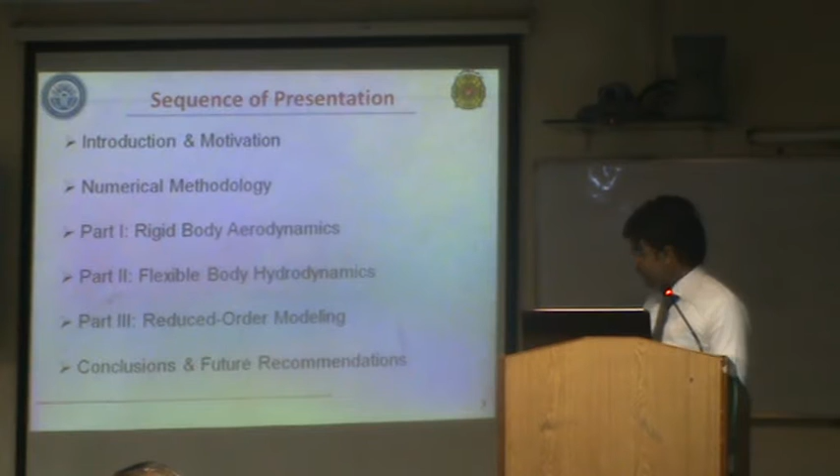So this is how I would proceed with this presentation. First, I would mention what motivated me for this study, and a brief introduction about my research methodology which I have employed for this research. Then I would move on to different research phases: Part 1, about rigid body aerodynamics, then flexible body hydrodynamics, and then we developed some reduced order models. Finally, I would move on to the conclusions, a few contributions I made during this research, and the future recommendations would be presented.

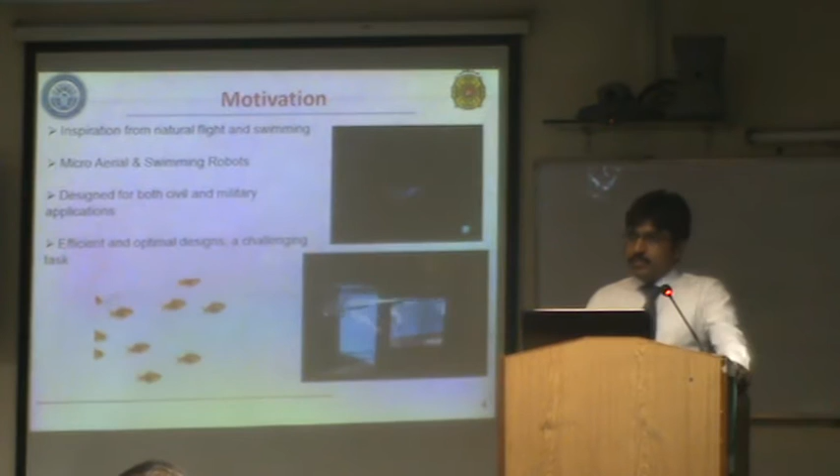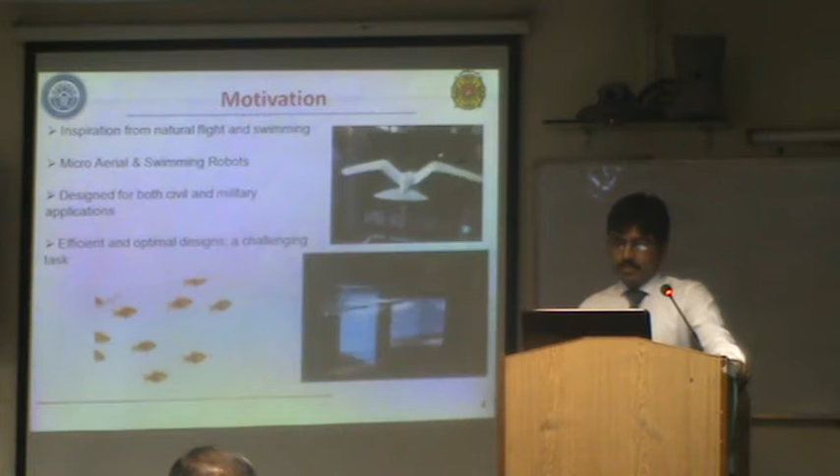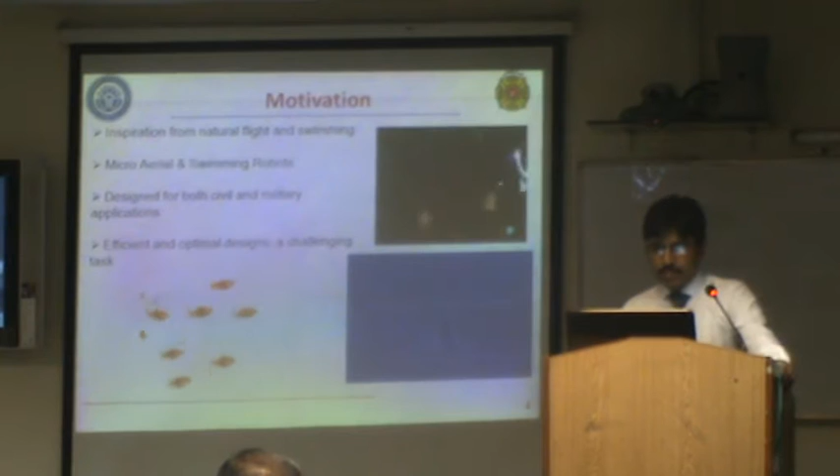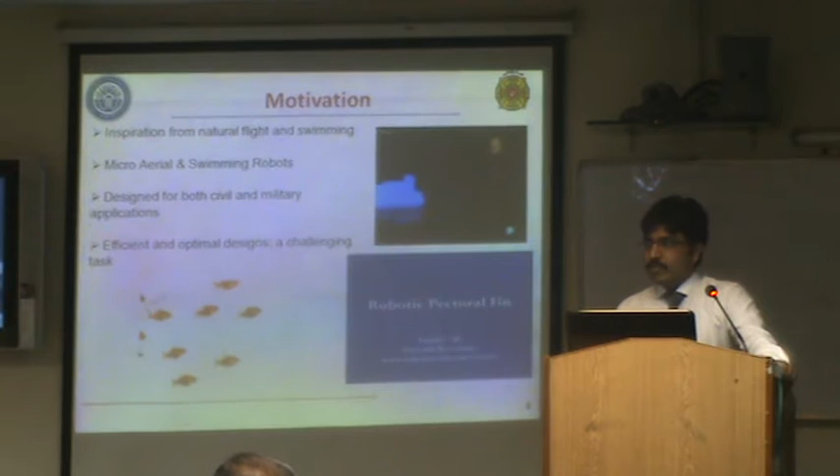Ladies and gentlemen, most of the time, inventions and discoveries take inspiration from natural systems. In case of micro air vehicles or micro swimming robots, the same inspiration comes into play. You can see a few applications over there, designed both for military and civil purposes. To propose optimized and efficient designs is a challenging task because so many subsystems and disciplines are involved.

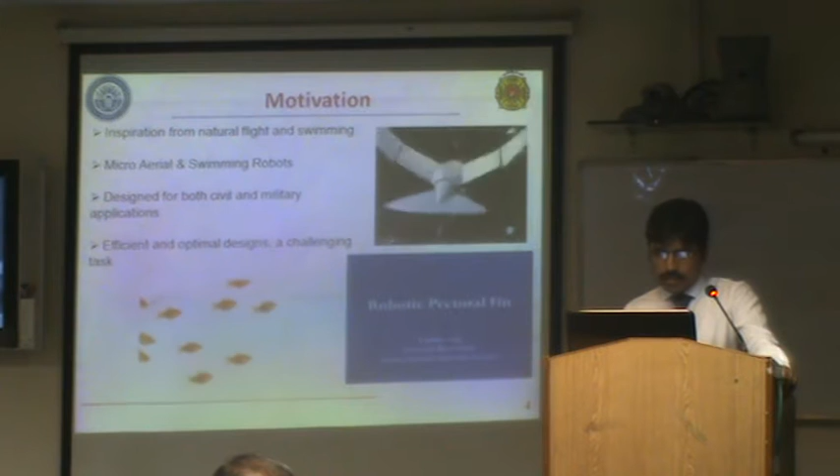Most particularly, I would like to have your attention on this particular figure where you can see multiple bodies swimming in some group. This is known as a fish school, and what they are doing, I would explain later on. They are trying to control the flow around them, taking advantage of each other.

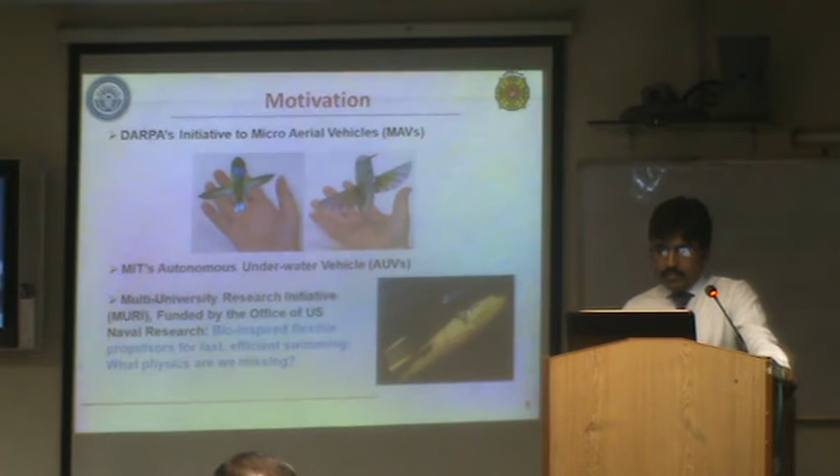These are examples of a few heavily funded projects. The first one is DARPA's initiative, the Defense Advanced Research Project Agency in the USA. In the 1990s, they initiated this project where they intended to develop micro and nano air vehicles. You can see one example over there. Still, it is just a prototype; they haven't manufactured it properly.

The second one you can see in this figure, the lower one, is about MIT's autonomous underwater vehicle. It is still under development. Then a very recent project is being done by a consortium of different universities in the USA, titled Bio-Inspired Flexible Propulsors for Fast, Efficient Swimming, but what physics are we missing. This is being done by Dr. Haibo Dong as well, and I was fortunate enough to have a place in that group for 6 months during my stay abroad.

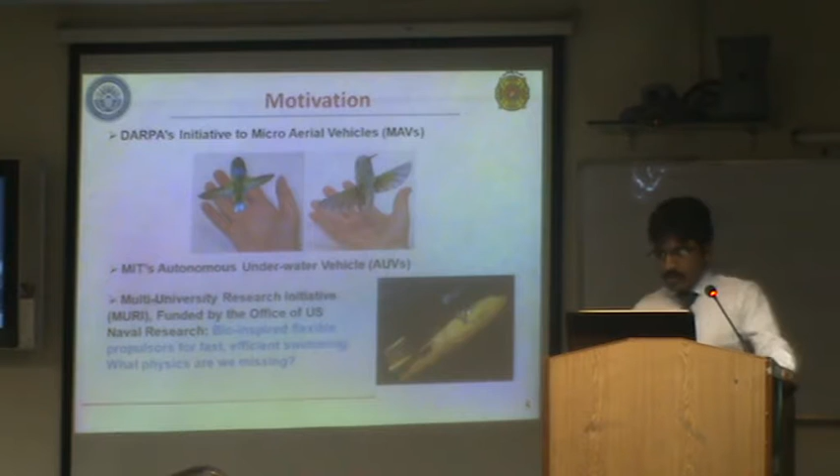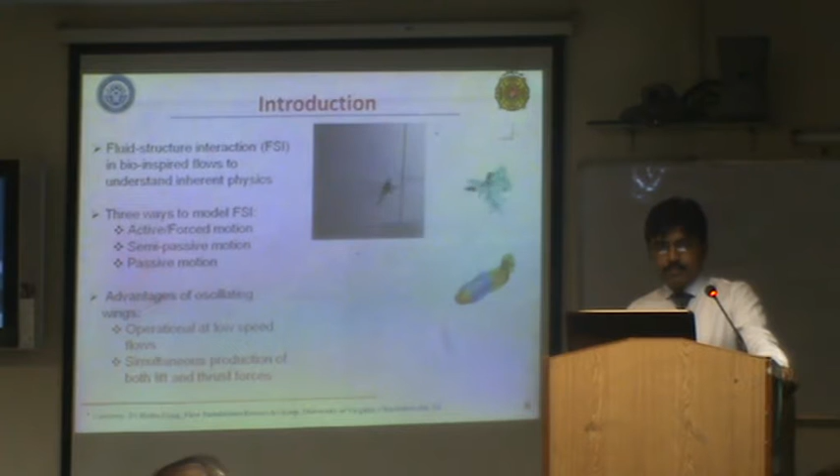Now, whenever we talk about natural systems and flying, it involves complex fluid structure interaction phenomena. Because we are taking inspiration from nature, these flows are known as bio-inspired flows. When performing numerical simulations to look at those phenomena, there are 3 ways to model the FSI. First, you give a mathematical function to forcefully move the structure. Second, some degrees of freedom of the motion are controlled by an explicitly defined mathematical function, while others are computed through feedback from the fluid. The third involves complete passive motion, which is the most difficult because it needs two-way coupling.

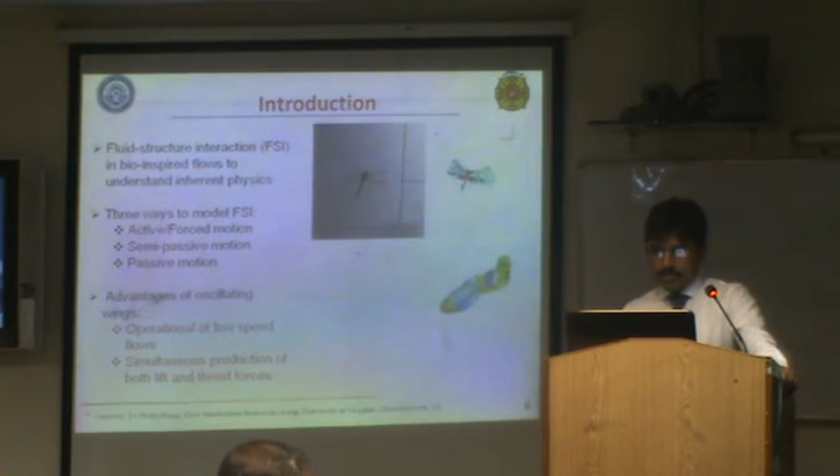As far as the advantages of this kind of motion are concerned, in nature you see these flapping and undulating motions in case of fishes. The advantage is that most of the time these species operate at low speed flows, and second, through this motion they simultaneously produce lift and thrust. That is why nature adopts this mechanism for production of aerodynamic or hydrodynamic forces.

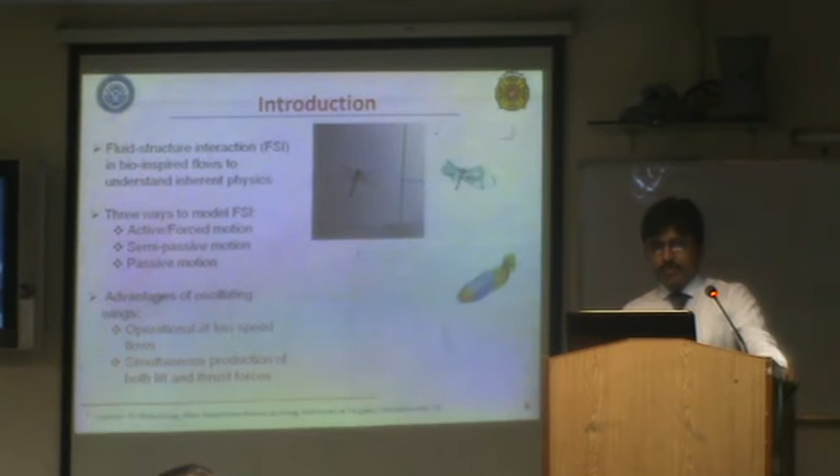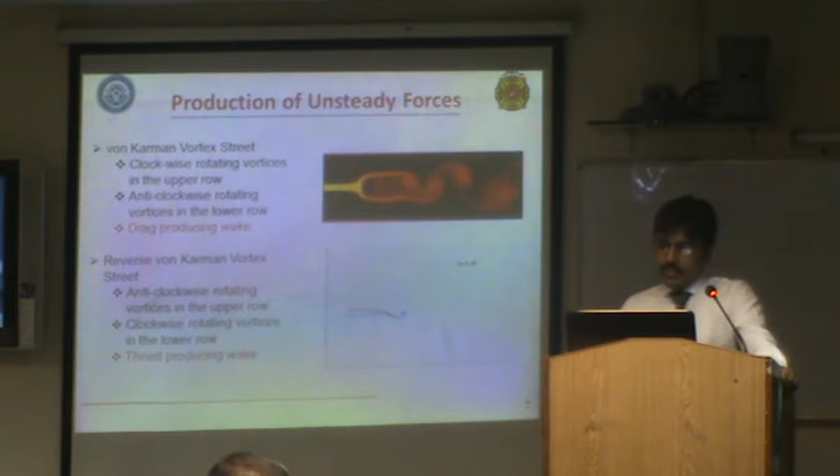If you look at the flow structures around these bodies, you see complex flow patterns known as vortices. This is a simple example of those vortices in the above figure. In the first figure, you can see a blunt body, a flat plate put in the flow, and you see certain rotating flows in the downstream direction. These structures are von Karman vortices, and they are drag producing.

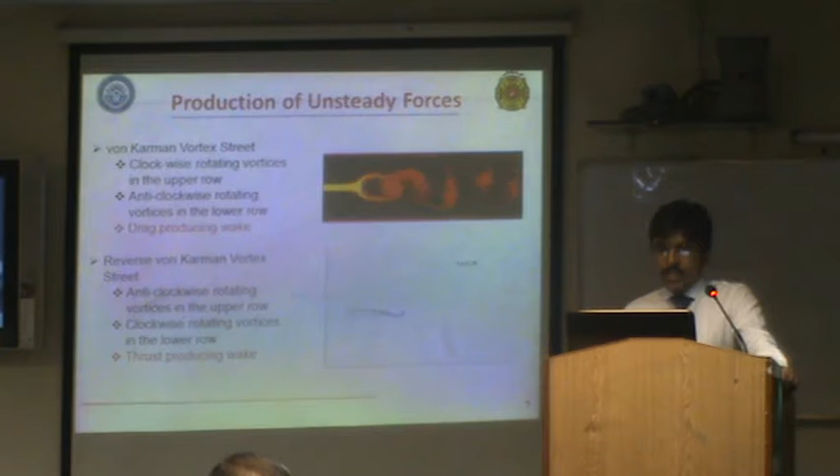If you look at the lower body, this is a streamlined body, a two-dimensional view of a wing or a fin. This produces exactly the reverse of that. For example, in the above figure you have clockwise rotating vortices in the upper row, but in the lower figure you would have clockwise rotating vortices in the lower row. So the effect would be reversed as well. The lower pattern is responsible for producing thrust.

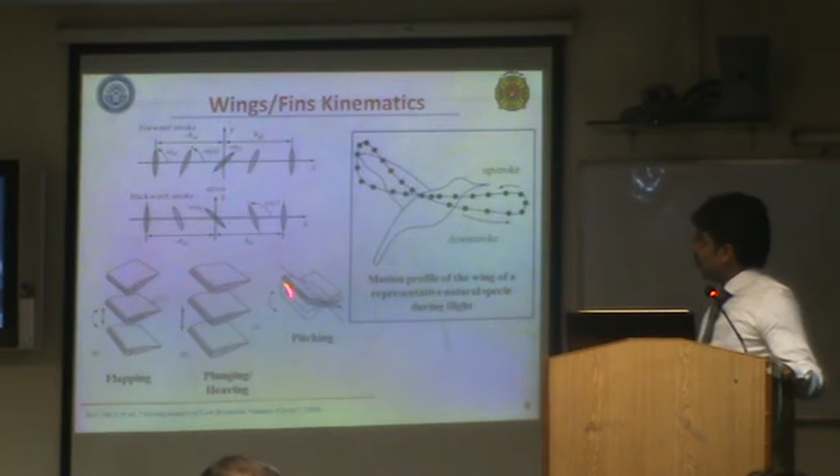So you can say that this figure provided me with a lead towards my study. The first research question which came into my mind was: what is the contribution of different kinematics towards the production of lift and thrust? So this is the first research objective.

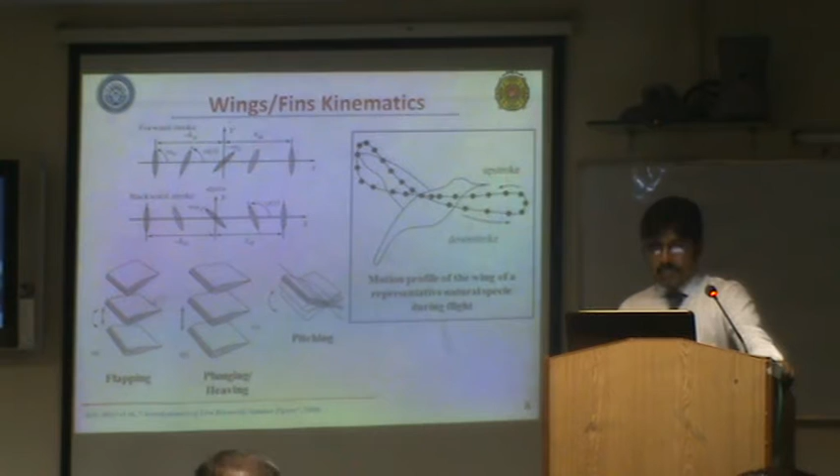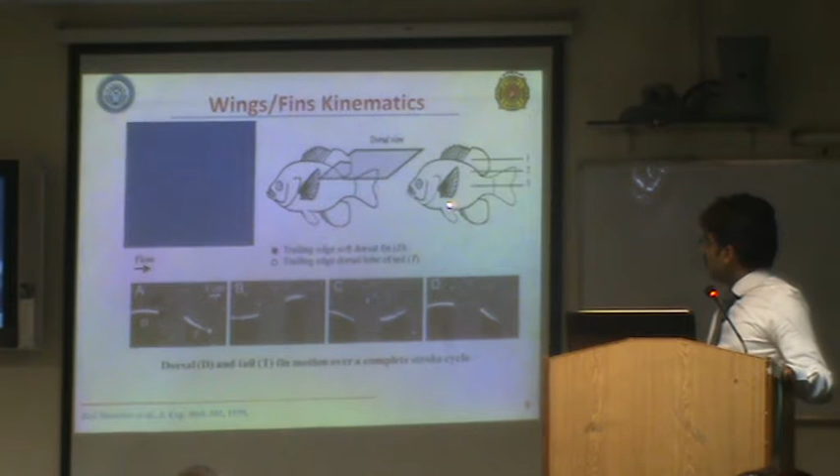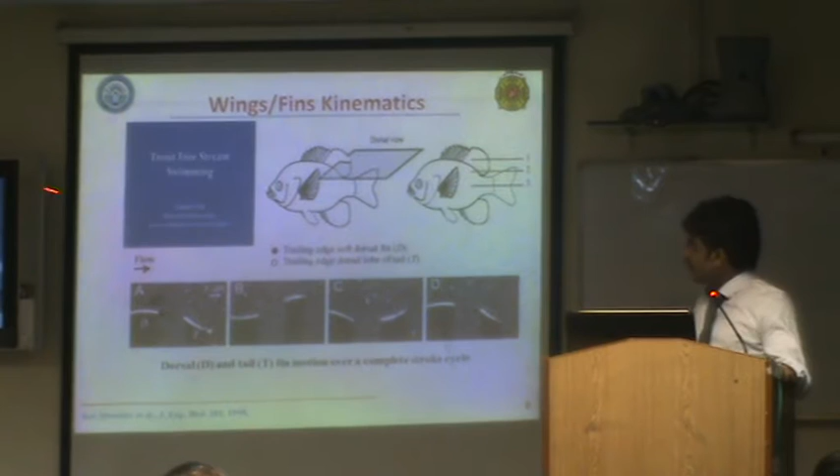The second one comes when you see that if we look at this plane where both tail and fin are involved, I am talking about the plane represented as number 2. These are the top views, and these tails and fins also perform a similar kind of motion, flapping. If you look at this video, that is the undulatory motion of a fish.

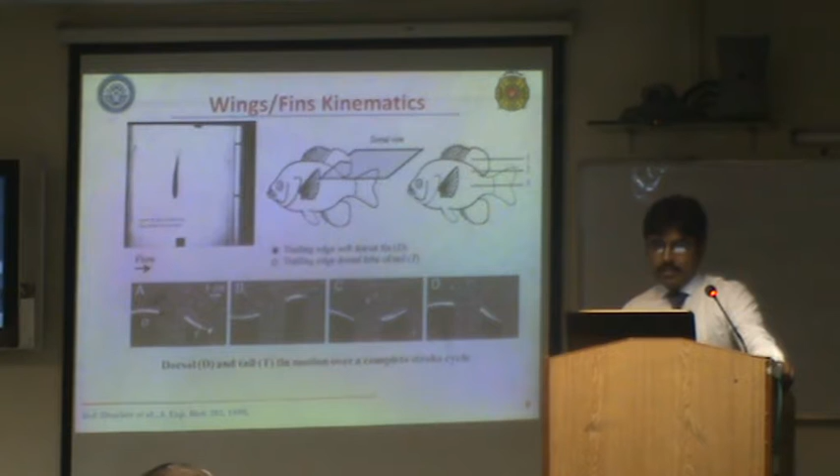So this provides me with a second question: what is the difference? Why do fish go for undulatory motion and why do birds go for flapping motion? What is the fundamental difference between those two motion types? Based upon my literature survey, these are the research objectives which I came up with.

First, to quantify the contribution of plunging and pitching motion of a rigid wing fin by finding an equivalence between them. This is just a way to look at the contribution both of these motions have towards the production of aerodynamic lift and thrust. The second objective is to look at the difference between the undulating motion and the flapping motion.

And the second thing is that I need to look at the passive flow control technique adopted by different fish while they are moving in a fish school. Looking at those things, I also did some mathematical work as well.

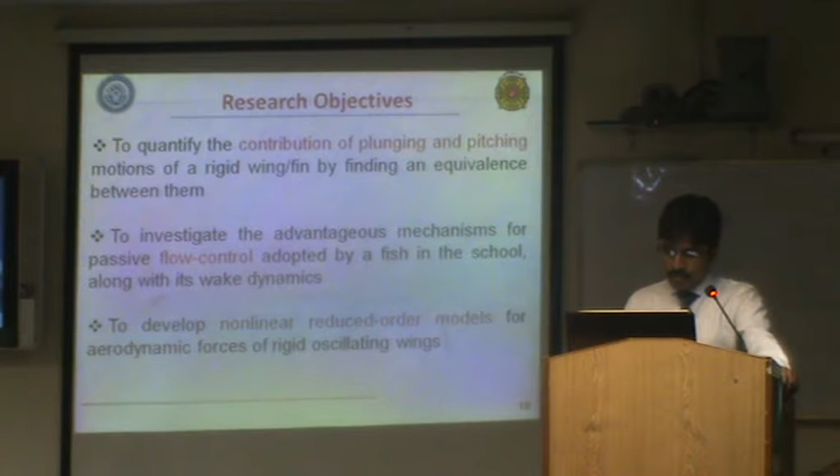I developed nonlinear reduced order models for aerodynamic forces of rigid oscillating wings. So these are, you can say, 3 parts of my research.

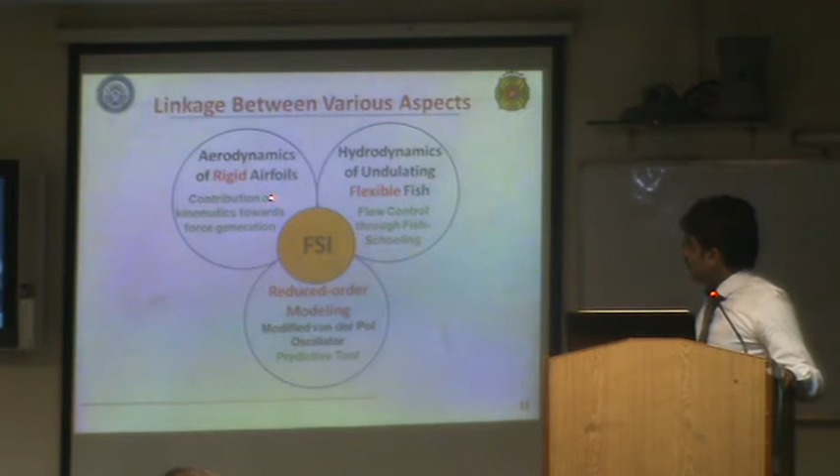In the first part, I am talking about aerodynamics of rigid airfoils, and the major thing is the contribution of kinematics towards force generation. The second part is composed of undulatory flexible fish, where I added flexibility into the rigid airfoil, and the major purpose is to look at flow control through fish schooling.

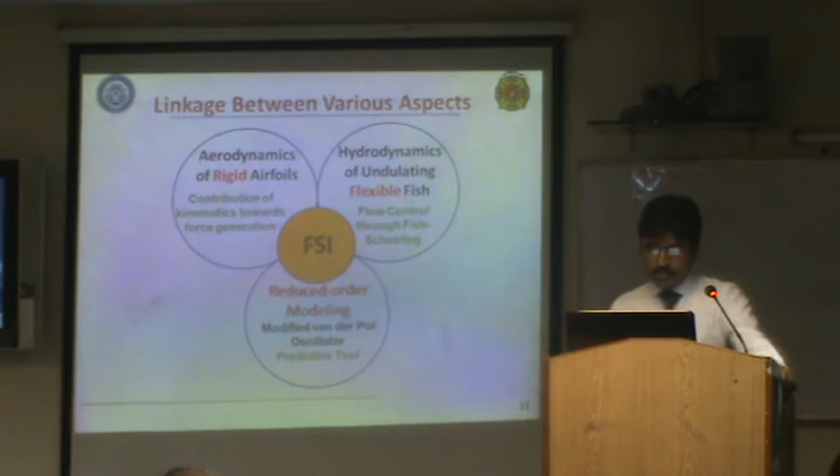And the third part would be the reduced order modeling, which is basically a predictive tool, and it gives us some advantage over the other techniques, the experimental one and the CFDs.

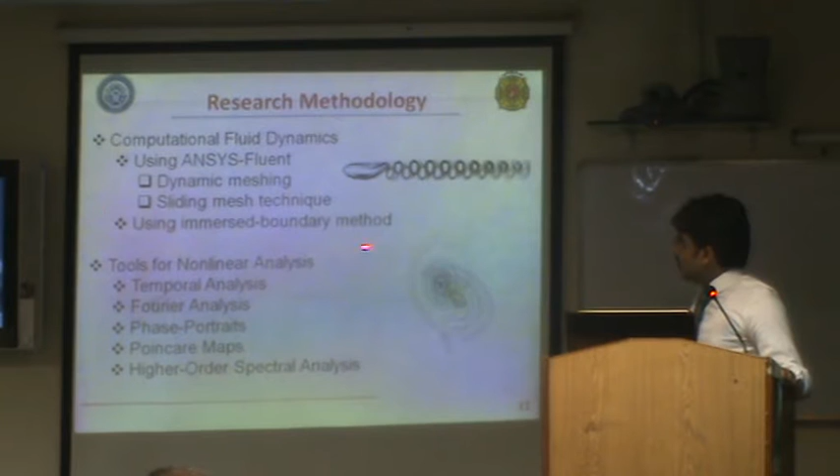Then during my stay at UVA, University of Virginia, I used an immersed boundary method code, which was developed by Dr. Haibo Dong. As far as the nonlinear analysis is concerned, I use modern tools to look at the behavior, the nonlinear characteristics of these flows.

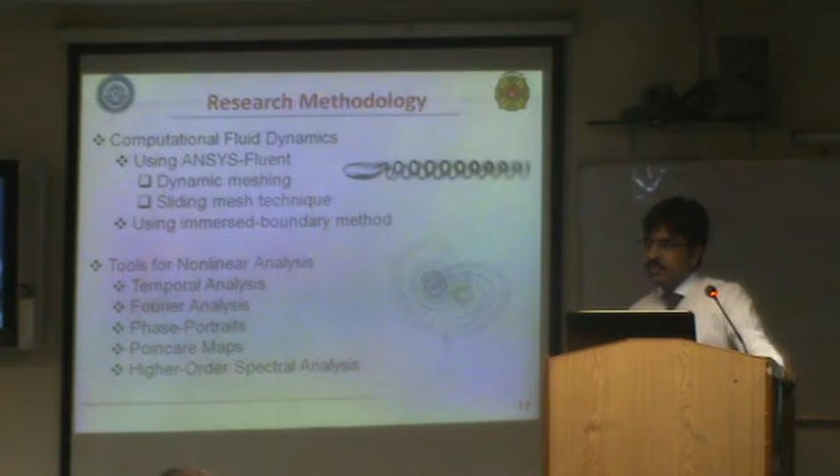The first tool is temporal analysis; you can see many features from these plots. Then the Fourier analysis to look at the spectra. Then phase portraits and Poincare maps to look at the period of the solution. And then I perform higher order spectral analysis to look at the frequencies interacting with each other to produce new frequency components.

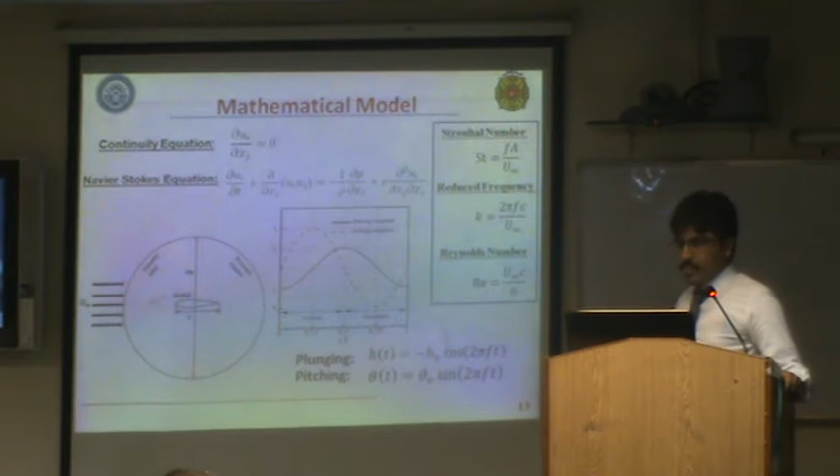As far as the assumptions are concerned for this study, I chose to talk about laminar flows because I needed to perform nonlinear analysis, so I did not want to incorporate the numerical dissipation added by turbulence models. The second thing is I added viscosity into it, because low Reynolds number flows are viscous in nature, so these forces are very much dominant.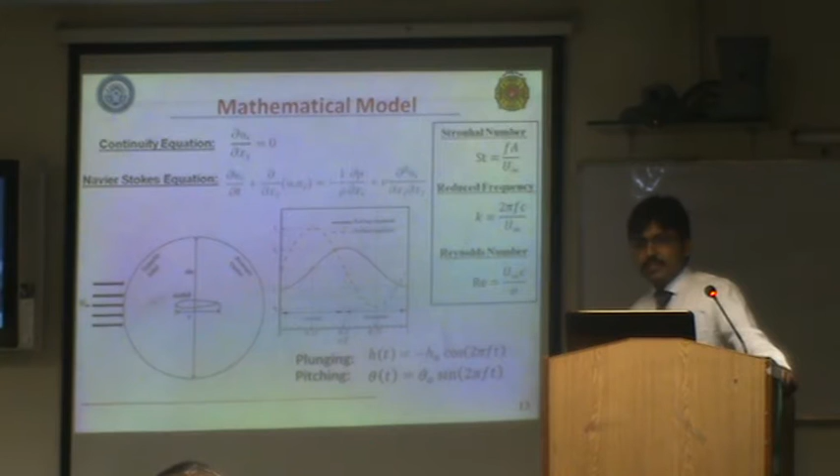If we look at the similarity parameters used for the experimentation, this unsteady aerodynamics is based upon the Strouhal number, reduced frequency, and the Reynolds number. F is the forcing frequency by which the wing is flapping or undulating, and A is the wake width, most of the time described as the displacement covered by the trailing edge of the airfoil.

Then I have reduced frequency, which is a non-dimensional frequency. We multiply the angular frequency 2 pi f with c, the chord length of the airfoil, and divide by u infinity. You can also see the Reynolds number, which is a ratio of the inertial forces and the viscous forces. So at hand we have low Reynolds number flow - I am talking about low speed flows.

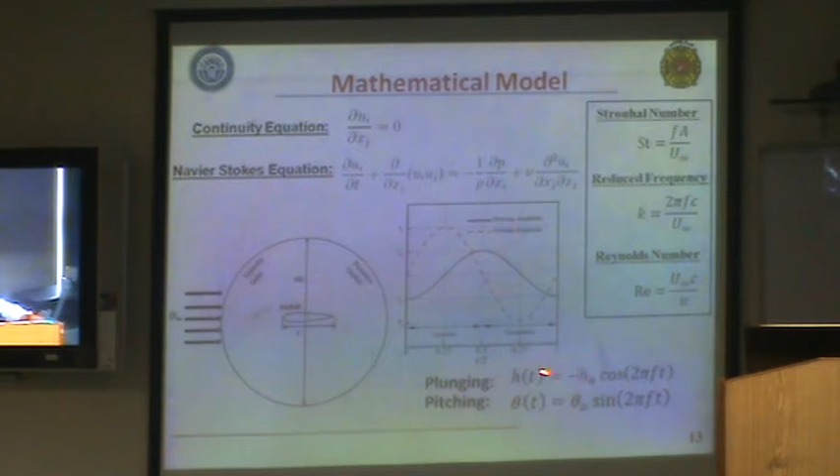Now this is the model - the mathematical model which I used for the first study for the motion of the airfoil. This is the domain, an O-type domain. On the left hand side you can see the velocity inlet, and on the right hand side the pressure outlet. For both plunging and pitching, they have a phase difference of 90 degrees. These are the schematics of those profiles.

This is the inner domain, which is basically pitching, and this is the outer domain which remains fixed. There is a non-conformal sliding interface between them. The outer side is the static zone, the inner side is the rotating or pitching zone. On this side we have time varying velocity, equal to the negative of the plunging velocity, and then we added a source term to look at the relative motion between the airfoil and the surrounding mesh. Outside we have the pressure outlet.

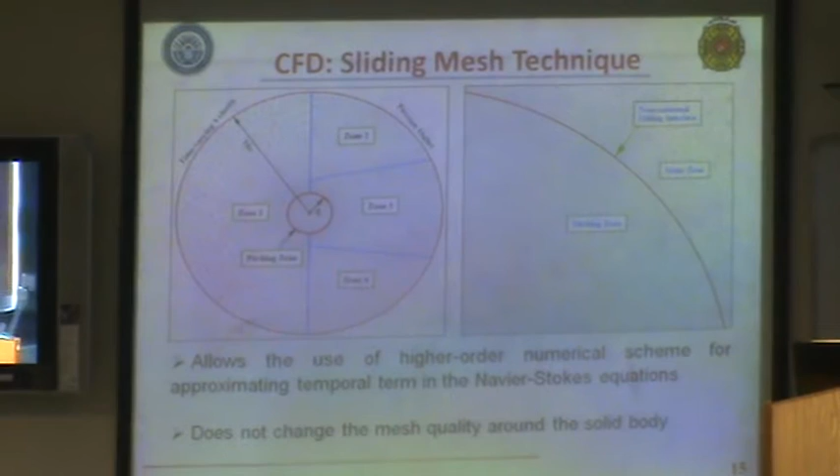So the advantage of the sliding mesh technique is that it allows the use of higher order numerical schemes, the second order temporal scheme in Fluent. The major advantage is that mesh quality remains the same - it is not going to be disturbed.

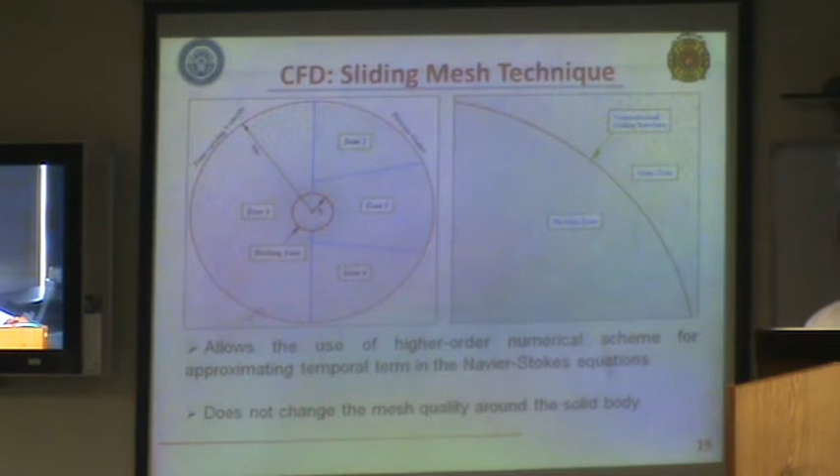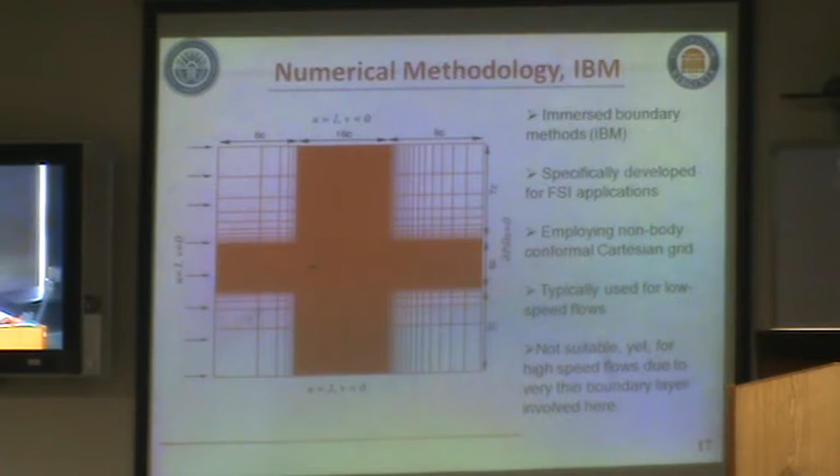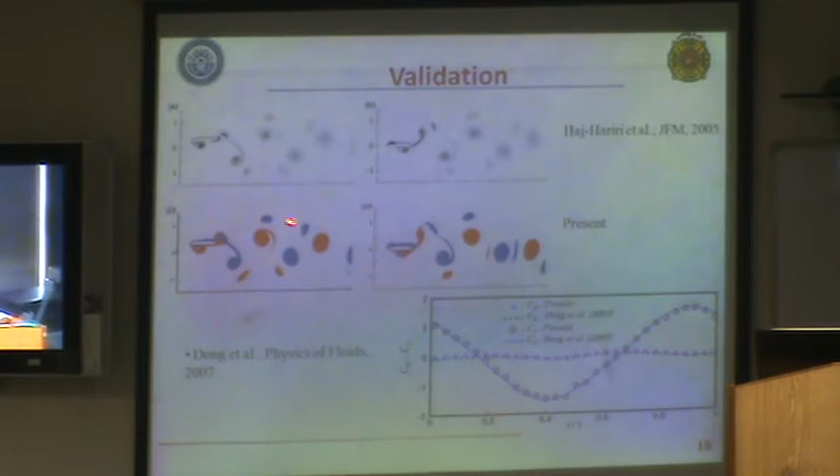Again, I also performed validation for that code. I used numerical data and experimental data as well, although it was already validated by the professor, but still I validated it to keep the setting correct.

Now I would move on to the first part of my presentation, the first part of my research - that is aerodynamics of rigid airfoils, and this is about the contribution of the kinematics towards force generation.

You can see these are the two elementary motions - this is pitching and this is plunging. We need to see what kind of equivalence can be set between them. If we look at the literature, the previous criteria to set the equivalence between them is based upon the effective angle of attack. The effective angle of attack criterion uses the motion of the leading edge, while we use the motion of the trailing edge. Why? Because in one of the papers, Dr. Young from UNSW mentioned that the actual thrust in this kind of motion is provided by the motion of the trailing edge.

So keeping his comments in view, we went for this kind of equivalence, and we came up with this equal Strouhal number criteria, where we set this total displacement of the trailing edge equal to each other.

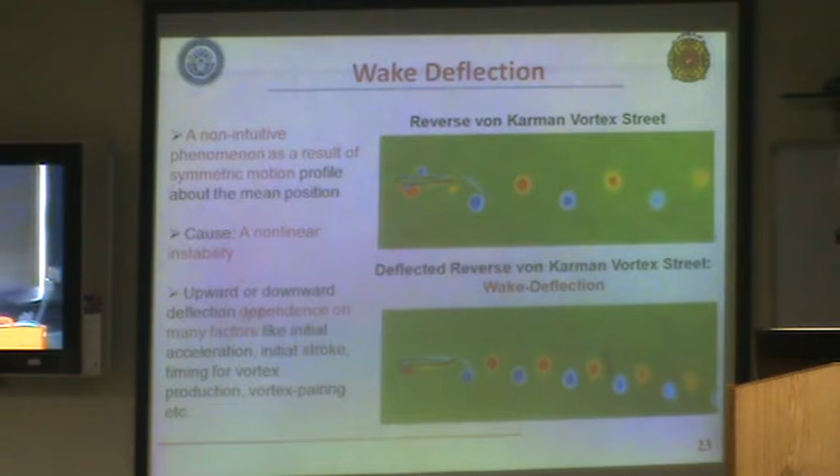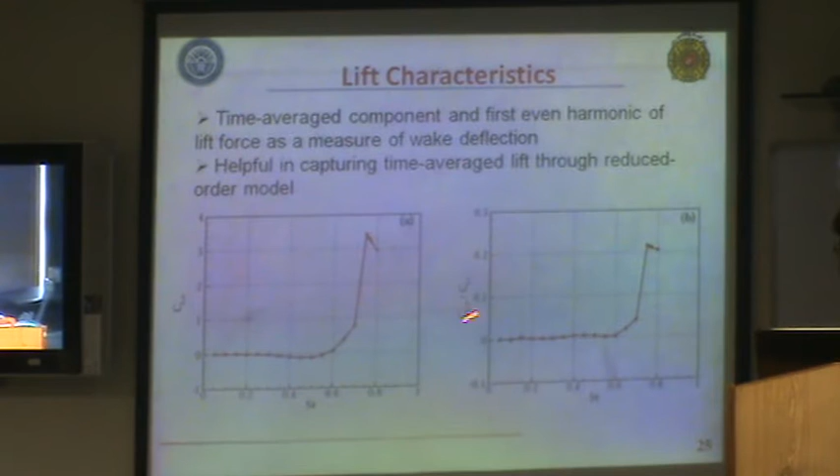So what we come up with is that the wake deflection is being governed by the quadratic nonlinearity, that we measured as the amplitude of Cl2. Now these results have already been published in the Journal of Aerospace Engineering.

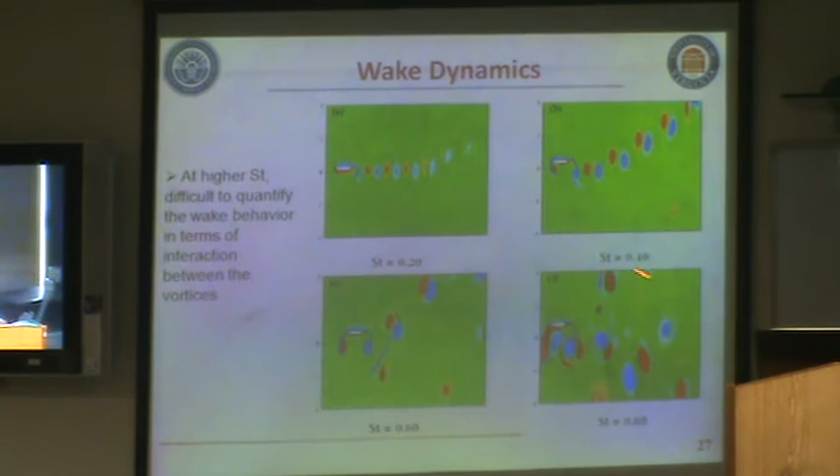Now a simple question can be, what happens if we keep increasing the Strouhal number? There is a wake deflection, no doubt at all, but then there comes the point where it all looks random. So this random vortex structure creates random lift or thrust forces, and those can't be controlled easily. So what we need to do is look at the nonlinear characteristics of this flow.

So I have performed that nonlinear analysis through phase maps and Poincare maps. At the first place, you can see that there are two loops in the phase map of Cl and Ct. If we plot Cl and Ct against each other, we have two loops. It means Ct is being driven by double the frequency of Cl, and the same is the case for slightly higher Strouhal number 0.32.

If you look at the Poincare map, you just have one dot over there. It means that we have a period 1 solution here. And if you look at the Strouhal number over there as well, again it is basically a period 1 solution. It is, you can say, a verification of the drag polar as well, where Ct is proportional to Cl squared.

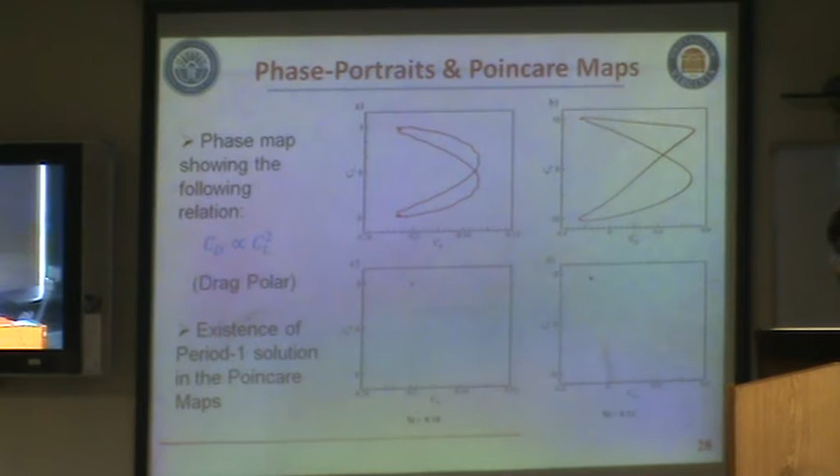You keep increasing the Strouhal number and you would say that the response type would change. You would experience certain kind of subharmonics in the lift spectra and in the drag spectra as well. If we look at the phase map, you can see that there are 4 loops. If we look at the Poincare maps, there are 4 dots. So it means a period 4 solution is being observed in the system.

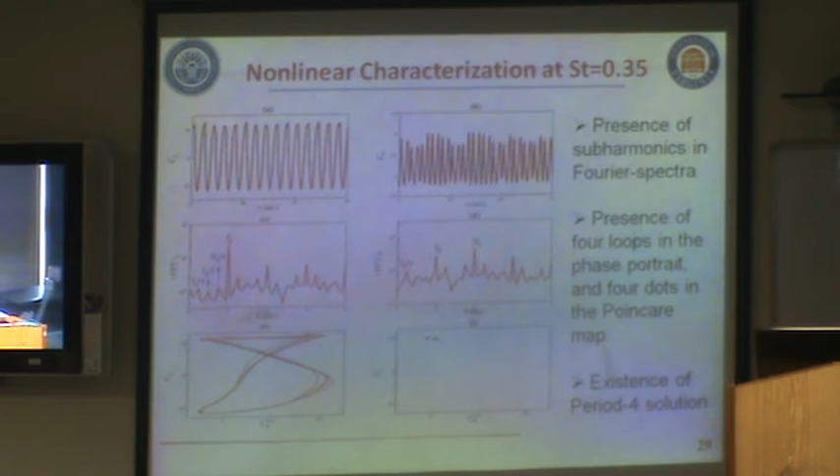To look at the interaction between different frequency components producing subharmonics and superharmonics, I have plotted this bispectrum. This bispectrum basically gives us a measure of the interaction between two frequencies. If you look at the color code, it gives the magnitude of the bispectrum. Looking at these frequencies, this describes frequency 1 on this scale and forcing frequency on this scale, and both are equal, by the way.

So we can say that the forcing frequency interacts with itself to produce double the frequency in the drag spectra. This is known as the bispectrum. If we keep increasing the Strouhal number, we see other components coming into the system, showing that some frequencies interact with each other to produce chaos.

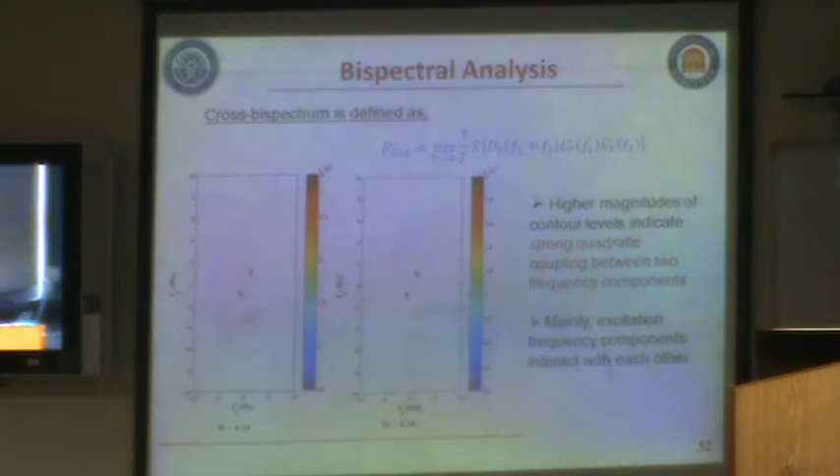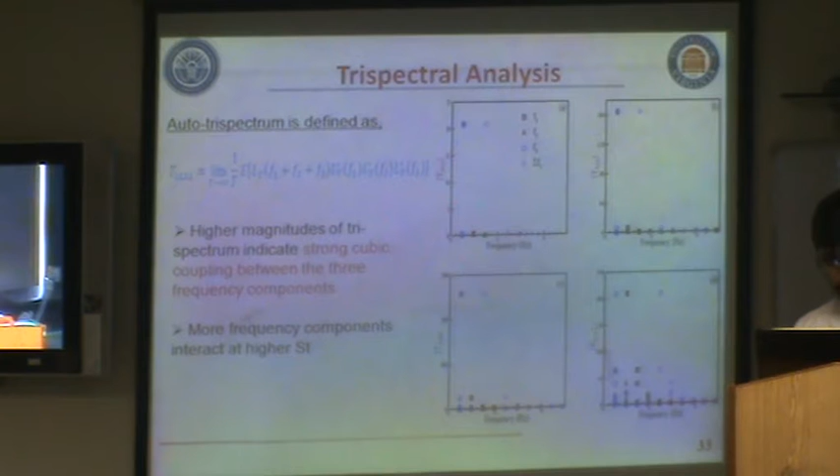And if you look at the highest Strouhal number, more and more frequencies start appearing on this plot. This means the cubic coupling is stronger in producing the chaos in this nonlinear system. We have already presented this result at the AIAA conference last year.

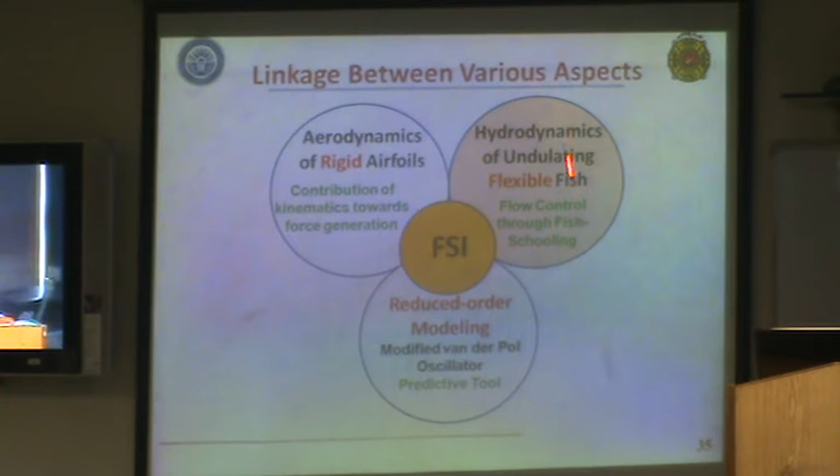Now I would move on to the next part. Here, what I added is flexibility into this rigid airfoil. Due to this flexibility, I am talking about the example of an undulating flexible fish. First, I would talk about the difference between undulation and flapping.

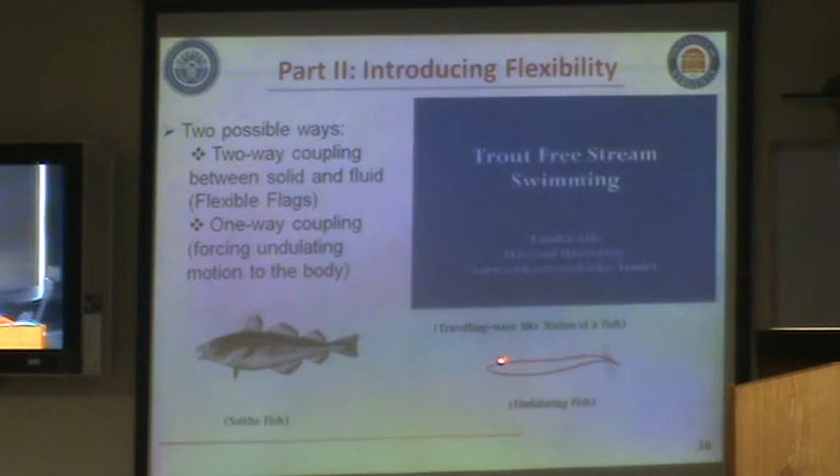These are a few examples; you can see I have already shown you this video. This is basically the traveling wave motion of the fish. I have taken the example of the saithe fish, usually found in the Atlantic Ocean, and this is the motion of the airfoil. You can see it is being modeled as an NACA 0012 airfoil, and the motion is provided at the chord of the airfoil, which acts as the spine of this fish.

Again, we can talk about two-way coupling, but in this case I am providing the actual motion profile, which was calculated by biologists and is available in the literature for the undulatory motion of this fish.

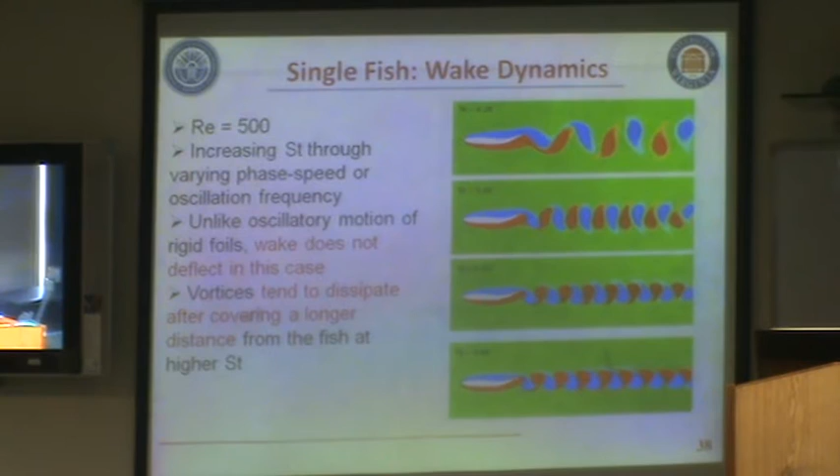So that is the difference. The vortices tend to dissipate after covering a longer distance from the fish at the highest Strouhal number. In previous literature, it was mentioned that if a fish undulates with higher frequency, those vortices would tend to dissipate after covering a smaller distance in the downstream direction. But these results are new, you can say the vortices get stronger and stronger.

Now this is the figure. If you remember, I just show you this figure again. This is for wake deflection, and this is for undulatory motion in the case of the swimming fish. You see that although the Strouhal number remains the same, in this case we do not observe any kind of wake deflection, but in this case we are observing some kind of wake deflection. So you can say that the nonlinear instability which is over there was not experienced in this case, and most probably that would be the pitchfork bifurcation which comes into play to bring that wake deflection into the system.

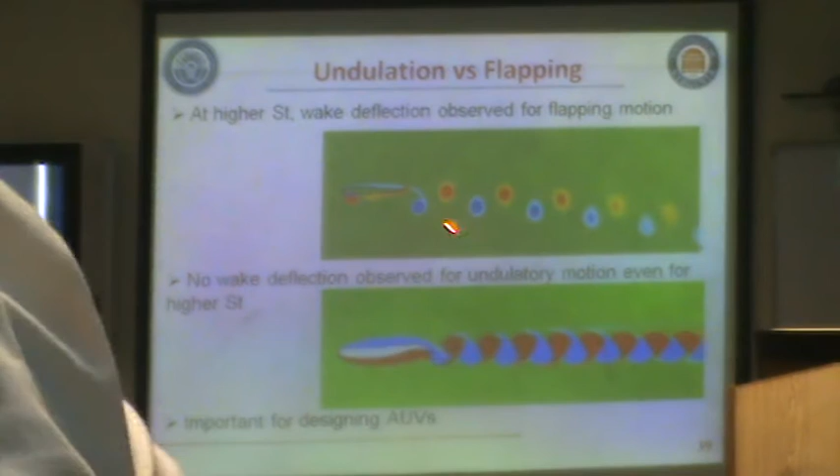Now why is it practically important? The practically important thing is that if we are talking about wake deflection, it gives some kind of non-zero time average value of the lift on the structure. That means you need to add a control surface at all times if you are implying flapping wing for designing autonomous vehicles. What you can do is change the motion form and avoid that kind of time average value.

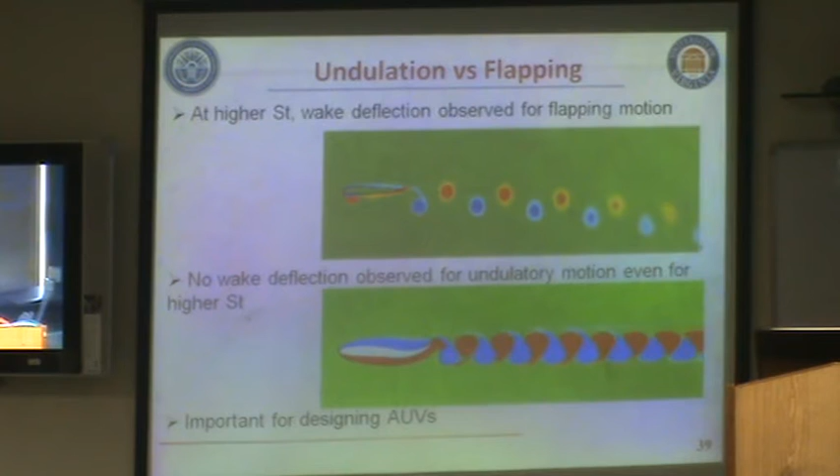Now I would come on to this part where I am talking about flow control through fish schooling. Here we have put two fish in tandem configuration, and the first fish is undulating with greater frequency. The second fish is undulating with lesser frequency. Why is it so? Because in fish schooling, you would always see that the follower fish, the rear fish, undulates with reduced muscle activity.

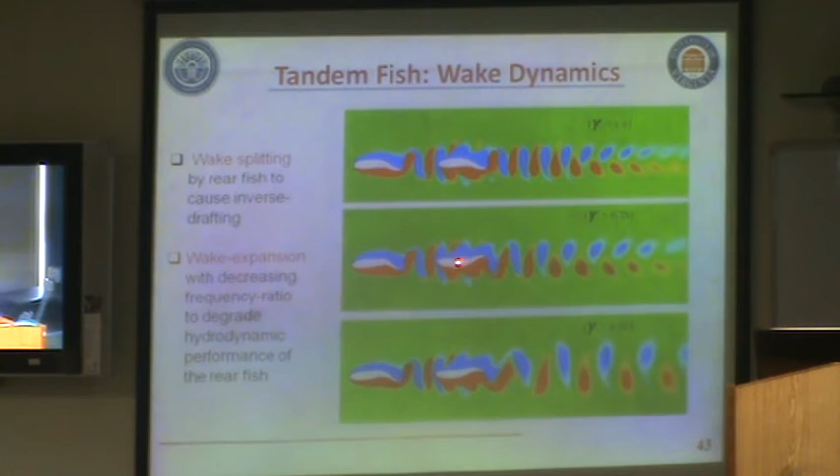What happens to the upstream fish? It takes advantage of the inverse drafting due to wake splitting. What wake splitting does is that the rear fish splits the wake in the downstream direction of the upstream fish. So its pressure increases, and because its pressure increases, it adds lesser pressure drag onto the upstream fish.

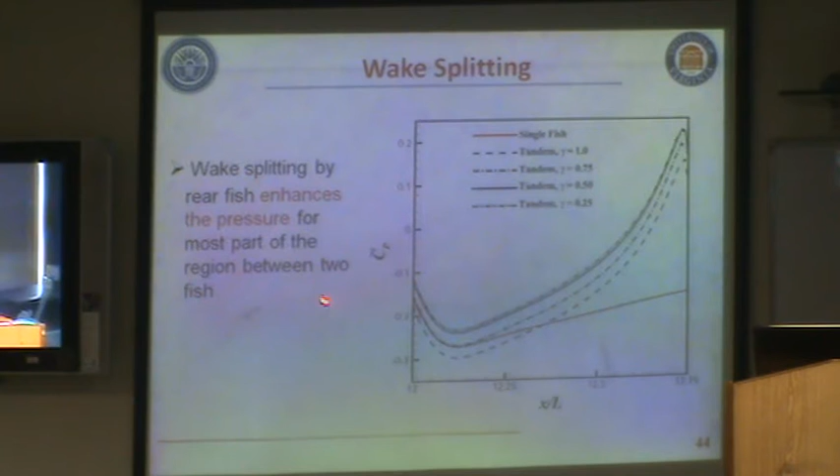This is already there. We are to submit the revised manuscript. The final one, we have already received the positive comments on it from Journal of Fluids and Structures.

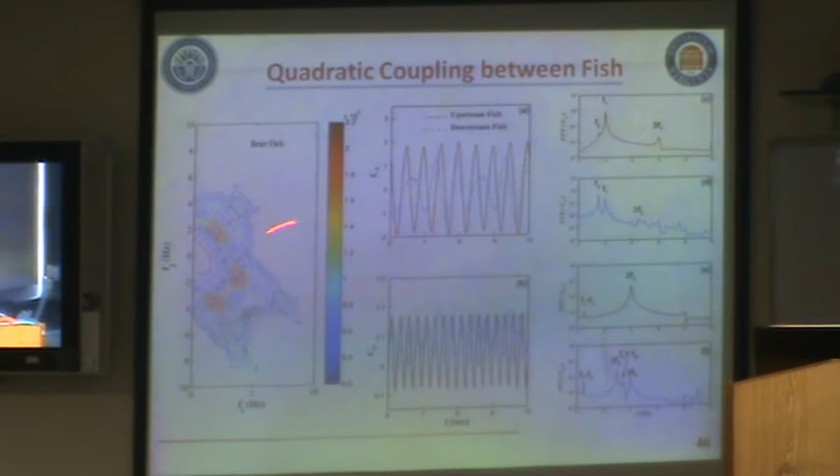I adopted the methodology described by these papers in the literature. We put certain probes in the downstream direction of the fish. I have computed different amplitudes of the harmonic components from the Fourier spectra.

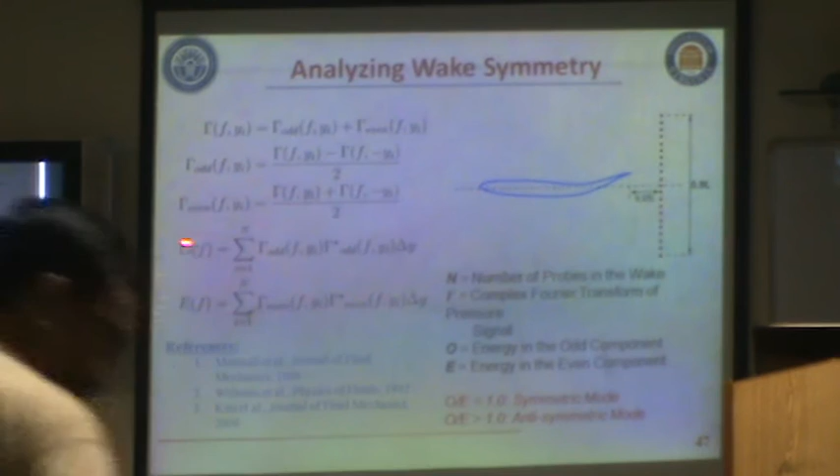From the Fourier spectra, I can decompose the velocity signal into its odd part and its even part. Then from the odd part and the even part, you can compute the energy levels, which we represent as O for the odd energy and E for the even part's energy. If the ratio O by E is greater than 1, it means the odd mode is dominant. If the ratio is less than 1, it means the even mode is dominant.

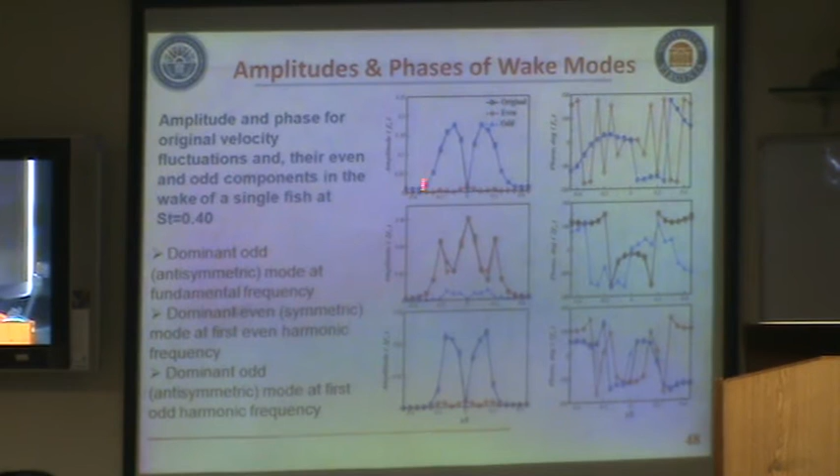If you look at these plots, these are representing phase plots and amplitude plots for different frequencies. If you move in the vertical direction, these are the profiles of original velocity signals and its even and odd components.

In this figure, for frequency F1, which is the actual forcing frequency of the fish, you can see that the odd frequency component is dominant. It means that hydrodynamically this is an anti-symmetric mode.

If you look at 2F1, this is being generated by F1 frequency with itself. So it needs to be reversed, because according to symmetry principles, those two anti-symmetric modes should combine together to produce a symmetric component.

So this is symmetric. Why? Because you can see that the even component is almost equal to the original one and the odd strength is very small. If we look at the 3F1 component, this is being produced by the interaction between F1 and 2F1.

F1 is an anti-symmetric mode, 2F1 is a symmetric mode, so it means due to their combination an anti-symmetric mode should be produced at 3F1. This is the case which can be seen also in this figure.

The interesting thing is that the symmetry principles which have been defined for bluff bodies earlier, in the case of a circular cylinder or oscillating circular cylinder, they are also true for streamlined bodies. So you can say this is a similarity found in the nature of all these kinds of flows, although the body type is completely different.

These are the ratios for different Strouhal numbers at different frequencies for the single fish.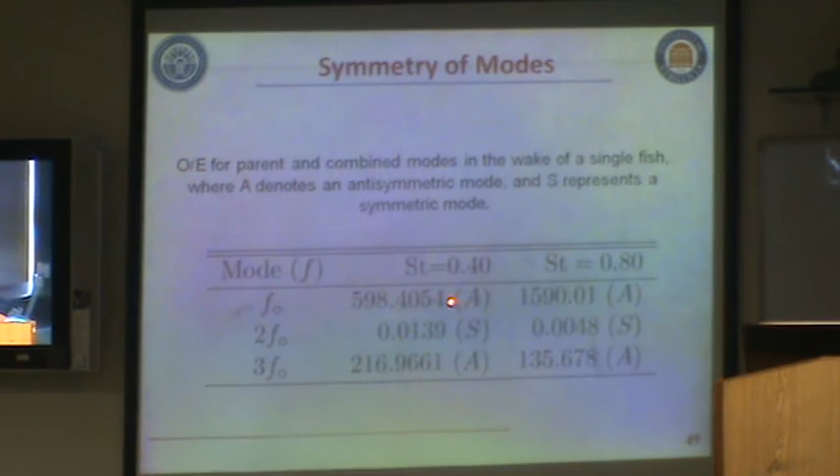Now this is the last part of the research. I am talking about the reduced order modeling. Once we talk about the nonlinear features of both of these airfoils, the rigid one and the flexible one, I talk about the mathematical modeling for the lift force produced by these airfoils.

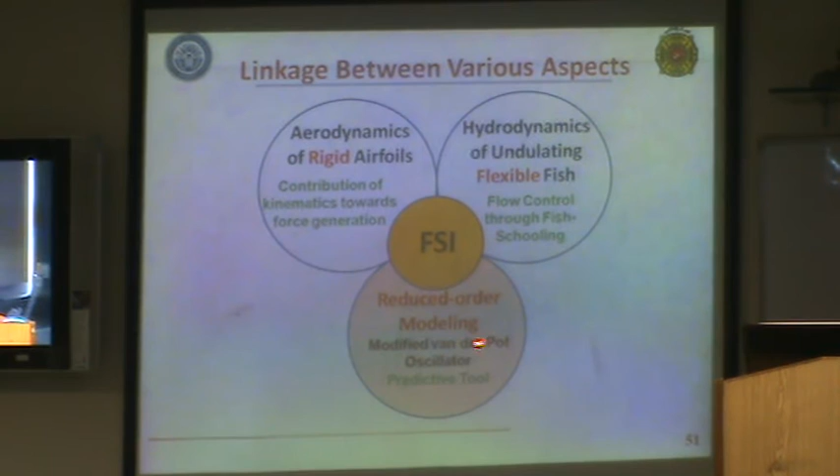I did that through a Van der Pol oscillator model, a well-known model in nonlinear mechanics. I developed that model for the pitching airfoil, plunging airfoil, and flapping airfoil, so you can see that one model would be applicable to all.

Why do we need to develop a reduced order model? Because we have experimental techniques which can be costly, and CFD techniques which can be very time consuming. So we need simple approaches, and this simple approach is a reduced order model.

That reduced order model can be composed of a simple ordinary differential equation, like the one I am going to present, based upon self-excited oscillators. We can model one dynamical state of the system using these models. This is known as the phenomenological approach.

Then we have a direct approach as well, where we can talk about computation of reduced basis for model reduction, and POD, proper orthogonal decomposition, is a famous example.

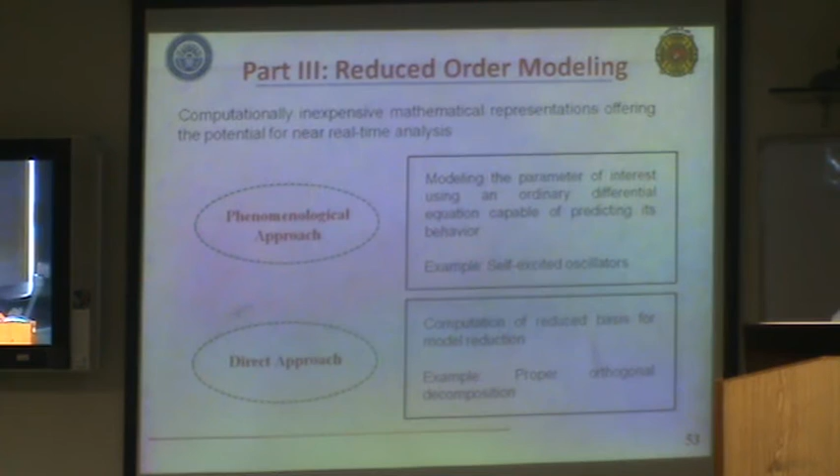The solution is attracted towards the same, you can say, contour or same attractor. This happens in both cases, and also for CL-CT. We have already observed this, it is quite natural.

After proving that a limit cycle exists, we modeled the lift of the airfoil through this Van der Pol oscillator model. What I introduced is the appearance of this CL squared term, which is important due to the wake deflection at high Strouhal number. We modeled the behavior of this quadratic nonlinearity through alpha CL CL dot.

This can be computed through CL square, this can be computed through CL dot square, this can be computed through CL CL dot. So the choice is made based upon the phase between the two components.

So I did that through alpha CL CL dot. And this is the cubic damping, this is the forcing term.

I used the perturbation technique, a well-known method of multiple scales. The advantage of that method is that you assume different time scales. You can assume the fastest time scale, T0 equals T, representing seconds. You can say this is the slower time scale, and this is the slowest time scale, which sort of represents hours.

Considering the primary resonance, why? Because the vortex shedding frequency is exactly equal to the forcing frequency. The excitation force is modeled using a cosine function, and in the method of multiple scales, the first order derivative and the second order derivative are defined like this.

The assumed solution for CL of T, to apply this perturbation technique, is a second order solution: CL0 plus epsilon CL1 plus epsilon square CL2. This epsilon is just a bookkeeping term.

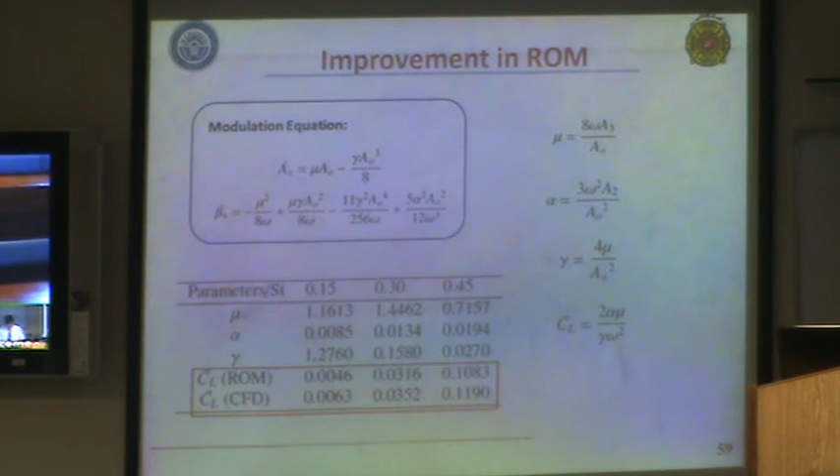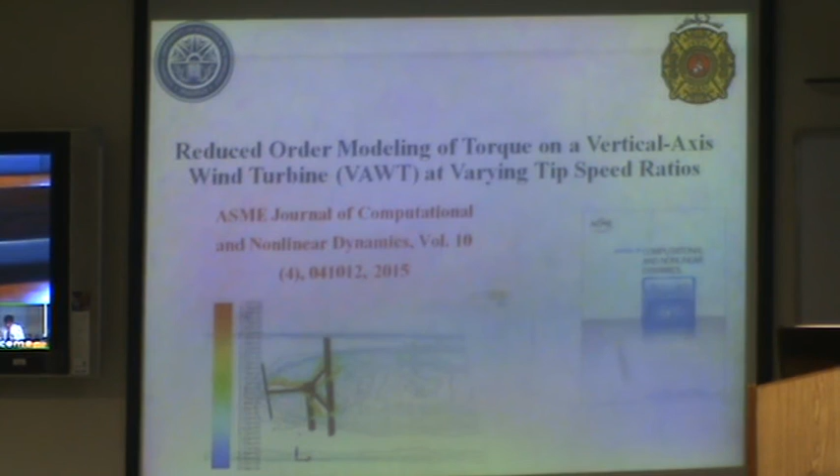So as an example, we applied the same model towards the torque of the wind turbine. Those results are already published in the Journal of Computational and Nonlinear Dynamics. So this is the model.

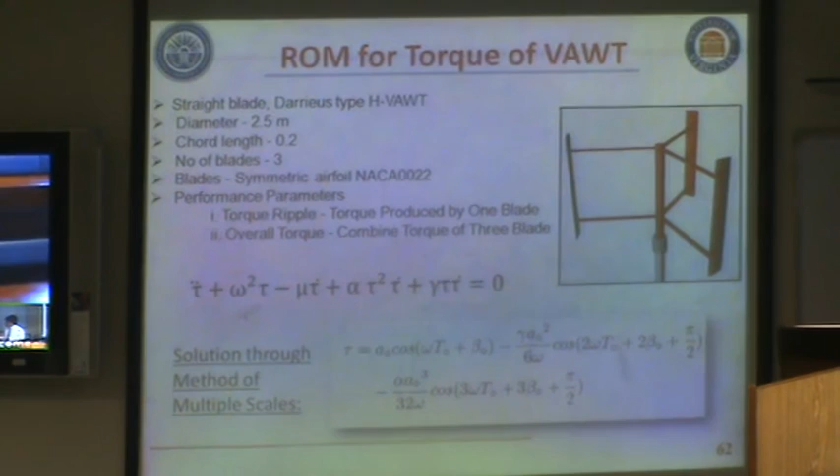Now coming on to the contributions. In this doctoral research, I developed equivalence between pitching and plunging motion. This is a significant improvement from the previously proposed criterion.

And then we compared undulatory and flapping motion, and we come up with the conclusion that no wake deflection is observed for undulatory motions, and this is quite important for the design of autonomous underwater vehicles.

The third contribution is we quantified the drafting and inverse drafting for fish undulating asynchronously in tandem configuration. This is again quite important if we are talking about multiple AUVs.

So the forward fish can go with the reduced frequency, and this can save energy.

And finally, I developed reduced order models by introducing quadratic nonlinearity. So this helps us look at the model, look at the wake deflection as well.

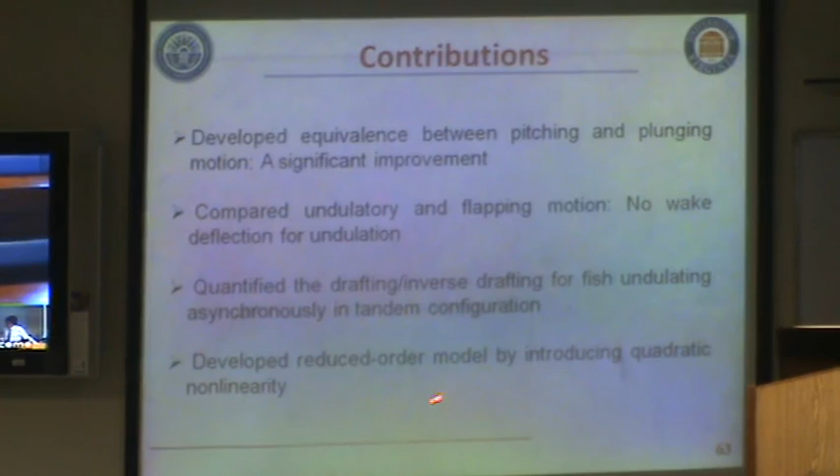Coming on to the conclusions of my doctoral research. First of all, I identified the role of the airfoil's trailing edge kinematics for plunging equivalent pitching amplitude, and developed the equivalence criteria, which is better than the previous one for lift as well as for most of the thrust.

And then I established that quadratic nonlinearity is the governing factor for the wake deflection phenomena. I established that the route to chaos for flow over an elliptical oscillating airfoil at low Reynolds number is through quasi-periodicity.

We identified that there exists a limit cycle even if the airfoil starts its motion from different initial conditions, and these are physical initial conditions.

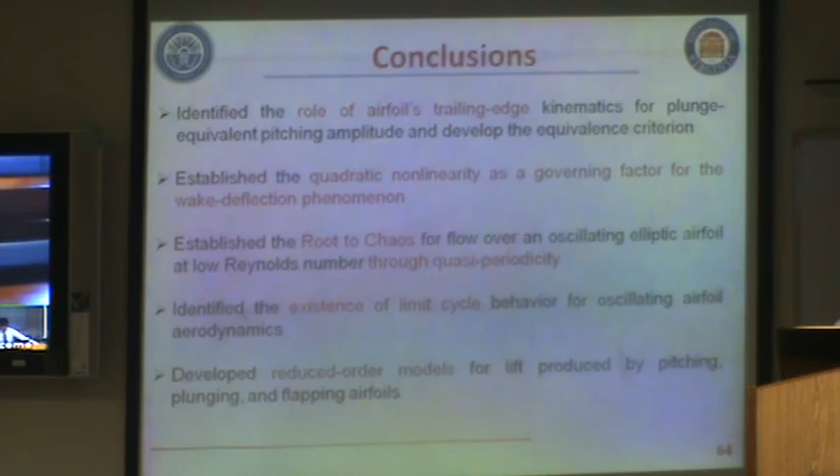And then we talked about the reduced order models which were developed for lift of the pitching, plunging, and flapping airfoils. As far as the hydrodynamics is concerned, for the flexible fish, we established that the upstream fish remains independent of the phase speed of the rear fish.

And then we talked about a certain range of frequencies, ratio, and distance between which drafting can be observed with reduced muscle activity of the rear fish.

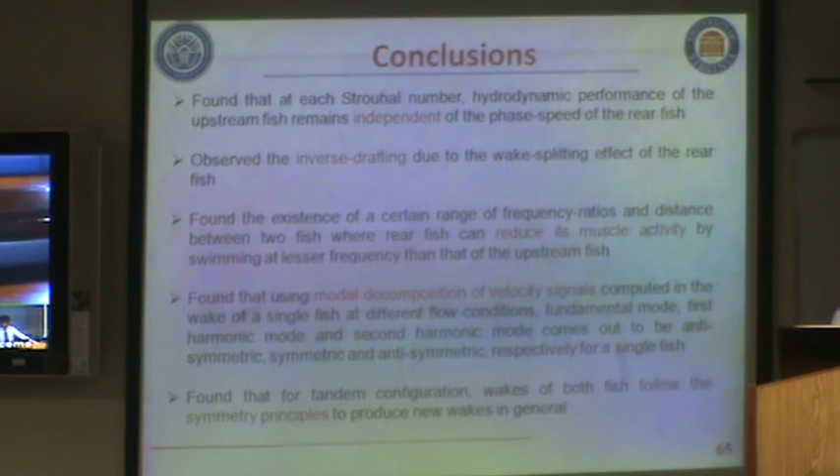And then we talked about the symmetry or the nature of the hydrodynamic modes. We found out that those modes follow the same symmetry principles which are true for blunt bodies. So this is important for finding out similarity between all the natural flows.

As far as suggestions for future work are concerned, nonlinear analysis can be more insightful if we perform three-dimensional or finite aspect ratio based flows. Why? Because they take so much time.

The simulation of three-dimensional flows takes so much time, and if you want to perform the nonlinear analysis, it may take even weeks, because we need to get a long time history for that.

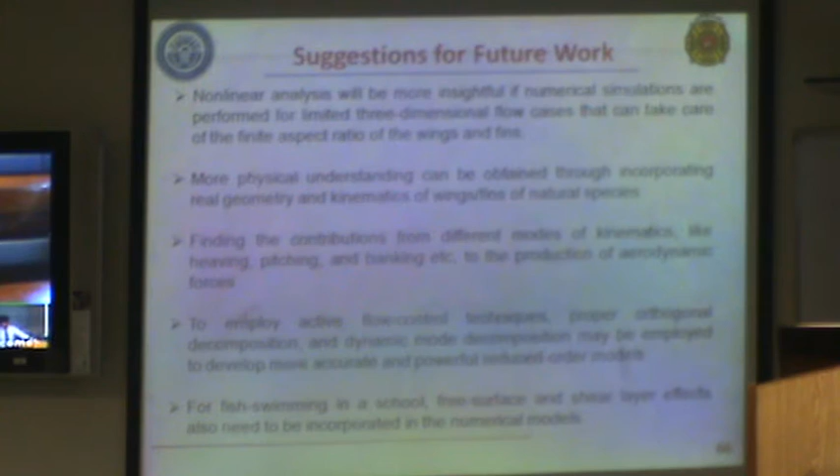More physical understanding can be obtained through incorporating real geometry and kinematics, which also involves banking of the wings. We can also involve passive flexibility into the system.

And then we need to see the actual contribution, what percentage of lift is being produced by which mode. So that is still to be done.

We have talked about passive flow control in tandem configuration. We can go for active flow control as well. So this study helps us to look at the dynamics of the system.

And then, because we are talking about fish swimming, which is an open channel flow, free surface and shear layer effects also need to be incorporated in the numerical models. So with this, I end my presentation.